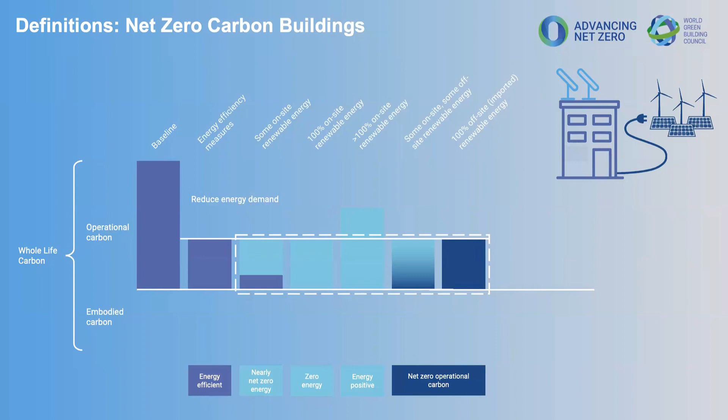And that's why we focus on the term carbon, net zero carbon, which means that you could supply some of your energy requirements from on-site renewable energy, but that the balance, or indeed maybe 100% of your energy, is met by off-site renewable energy generation from solar farms or wind farms, and that could be delivered through the grid, or it could be through power purchase agreements or renewable energy certificates. And so we call that net zero operational carbon, covering the emissions associated with the use of the building.

And then we have the need to reduce embodied carbon as well. So the embodied carbon comes from the materials and construction processes that go into creating the building in the first place. And again, the same principle applies: reduce embodied carbon to the minimum that's necessary in order to continue to build that building.

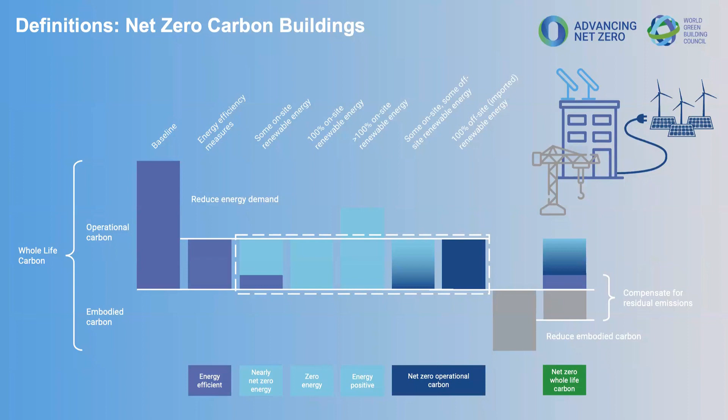If you're then able to compensate for any residual emissions that come from the operational carbon, maybe you're still connected to a fossil fuel grid, or maybe you have on-site diesel generators or gas boilers, even gas cookers, you can compensate for those residual emissions through high quality offset schemes. And that would mean that your building is net zero whole life carbon when you also include the embodied carbon within those calculations. So that's a very quick tour through the terms that we use, and hopefully that will help frame some of the things that I'm about to share with you.

So our Advancing Net Zero Whole Life Carbon mission and vision is based on a set of principles. Firstly, for operational carbon, reduce and optimize energy demand, then generate the balance of that energy demand from renewable energy, then compensate for any residual emissions, and then finally plan for deep decarbonization.

For embodied carbon, the same goes: prevent first, reduce your carbon first, and maybe that's through prioritizing renovating an existing building instead of building a new one, for example. You reduce and optimize your embodied carbon through your design choices, fossil fuel-free construction, or thinking about lean construction, and then the sorts of materials that go into the building.

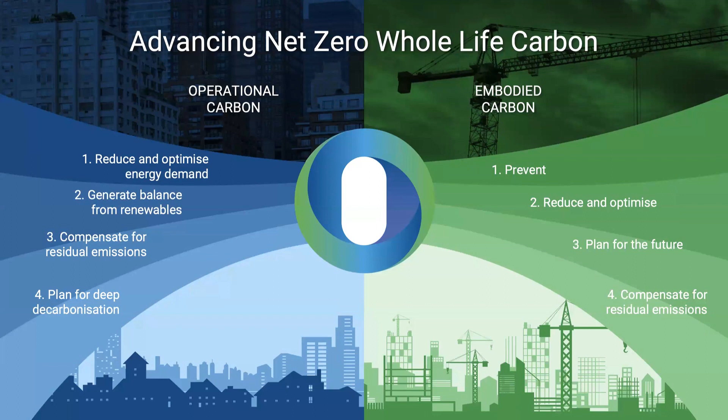Planning for the future, so thinking about how you can optimize a building to be renovated in the future, reconfigured internally so you don't have to move building, it's easier to use and extend the useful life. And how can you deconstruct that building so that you can use the materials all over again? And then finally, again, compensating for residual emissions.

I've mentioned our 2030 and 2050 dates already. We need to see all buildings as net zero, including existing buildings, by 2050. And that has a huge implication in the way that we design our buildings, the way we use them, the way we build them, and the supply chain as well. And we need to see for new buildings, where we have a greater opportunity to influence the way they're designed and built, that those are net zero from 2030. And that's just 7 to 8 very short years away. And in design terms of new buildings, that's just around the corner.

So we have introduced a leadership track that's called the Net Zero Carbon Buildings Commitment, and businesses and organizations commit through this commitment to achieving the 2050 dates by 2030. So that means that in their existing buildings, they're eliminating all their emissions and compensating with offsets, and that new developments are achieving maximum reductions in embodied carbon and also compensating residual emissions through those high quality offsets.

And that through their business activities, they are advocating for all buildings to be net zero whole life carbon by 2050. So for example, you're a design firm, the commitment covers the offices that you occupy, but then you're also presenting and using and channeling those concepts through the design work that you do as a firm. And that's really important because that's helping us understand what are the business models, the design approaches, the tools, the technologies, the materials, the innovation. What do we need in order to get from where we are now to that 2050 goal?

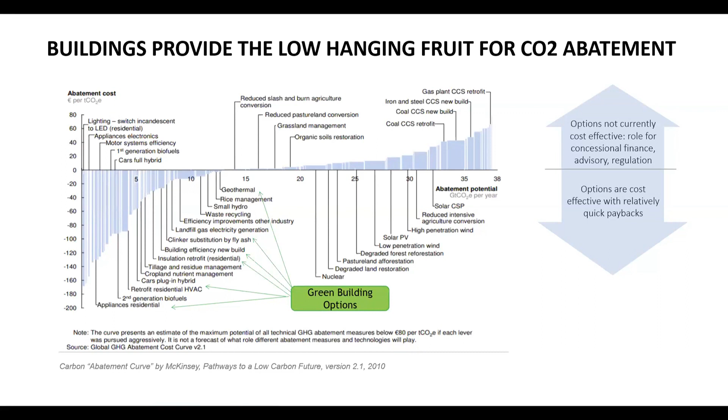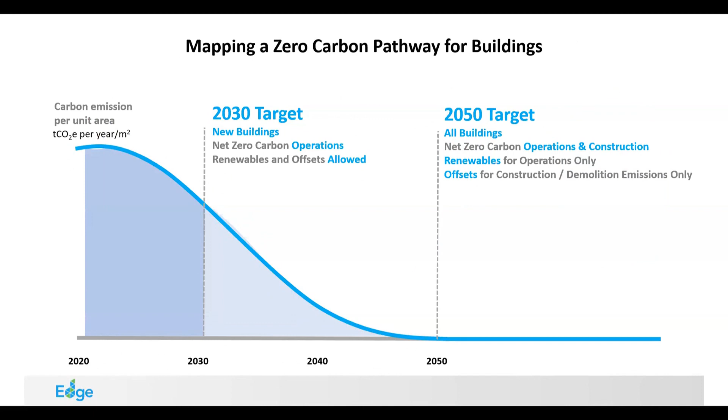Here you're able to see the path to net zero, which Ms. Burrows talked about in her presentation. The target, as she mentioned, was by 2030, all new buildings need to achieve zero carbon in operations. And by 2050, all buildings, both new and old, need to achieve zero carbon. Now, how are we going to do that? What we've seen is that between 2030 and 2050, we really need to set some targets for developers and for building owners on how they can decarbonize their portfolio.

For us, the first step should be to map the entire existing building portfolio within EDGE, and we will look at how that will be done. This will give the developer, the building owners, clear information on their current emissions, and then also the entire portfolio's carbon footprint. Then you are able to plan for the necessary retrofits that would be needed so that it can comply for the EDGE certification.

And then the second step would be to set clear certification targets. We think that building owners should be able to plan to bring their building portfolio to become compliant first. And then they also need to make sure that the new and existing buildings can comply with at least the basic certification system. So this would mean that each building should be saving at least 20% on energy, 20% on water, and 20% in embodied energy in materials. And this is for both new and existing buildings.

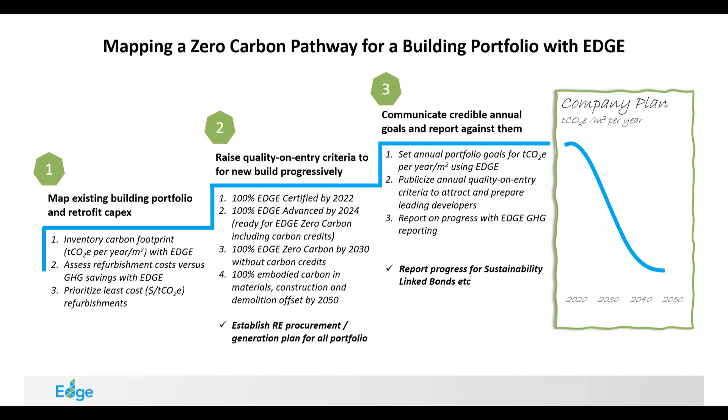Let's look at EDGE in general. So I did talk about the standards. EDGE basically includes a free software. It's a very rigorous but streamlined standard that looks at least 20% reduction in operational energy, operational water, and the embodied energy in materials. And it compares this to a local baseline. It also has a certification system which is administered through a very large network of green building certifiers in the world, but the quality control is done by the IFC.

Now, the interesting thing with the software is that it's able to get you to make decisions as quickly as possible. The interface is easy to be used even by a CFO who has no idea about buildings. He's able to figure out a rough financial cost and benefit of the certification in a few minutes. Secondly, architects can also work with the software even before they have a design to choose what set of green design options would be needed in their project. And this is very important because when green measures are incorporated very early in the project, you are able to reduce the extra cost of going green.

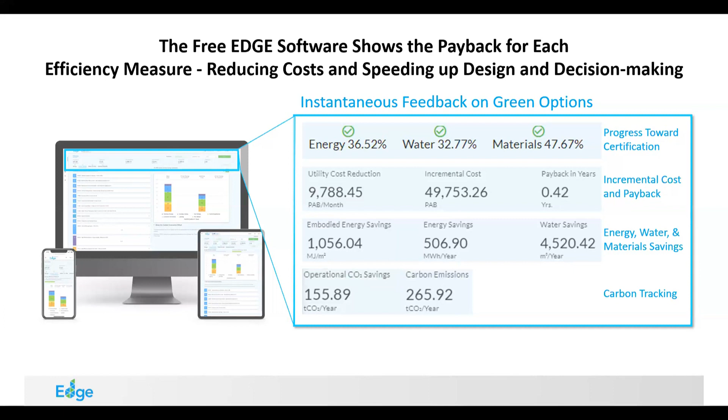Now, we've seen that EDGE has grown very quickly, mainly because it ticks the box for all the major green finance standards. So once it's utilized, you are able to access these financial requirements wherever they are available. Once the project is entered in the software, the designer can easily see what it takes to get EDGE certified. And you can either get EDGE certified, go EDGE Advanced, or the last bit being Zero Carbon.

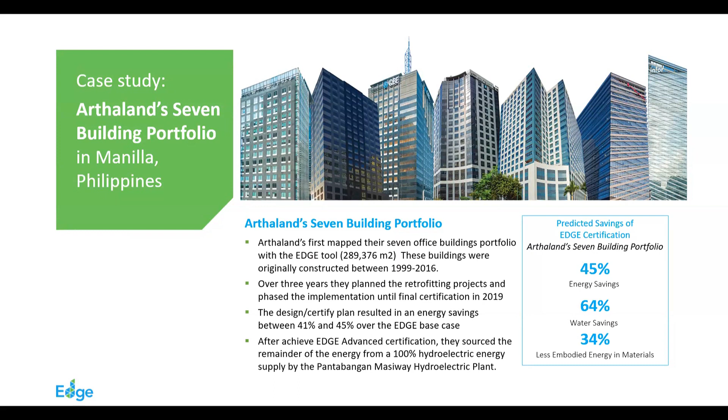Now, how do we really achieve the zero carbon certification? We see that it is possible with some very simple and sensible steps, and also by choosing your energy sources carefully. We have a client in the Philippines called Arthaland. They were able to certify their entire portfolio zero carbon by, first of all, reducing their energy consumption by 45%. And then they offset their energy with zero carbon hydroelectric power. But how does it really look within EDGE? This slide will help provide some more explanation.

There are a lot of options when you're looking at zero carbon certification using EDGE. The first and most important step would be to reduce your building's energy consumption by implementing passive measures. Examples of this could be having a reduced window to wall ratio, insulation of your external walls, insulation of your roof and floors, incorporating energy efficient lighting, and then, most importantly, making sure you have a correct orientation.

Now, these measures are not the most expensive ones. They are very, very cheap. And then also when it comes to implementation, it is very, very effective.

Secondly, you can also now look at the more active measures. For example, having efficient heating or cooling, putting in place lighting controls, putting in place efficient boilers, and more. This may be a bit more expensive, but they are also very effective at reducing energy usage.

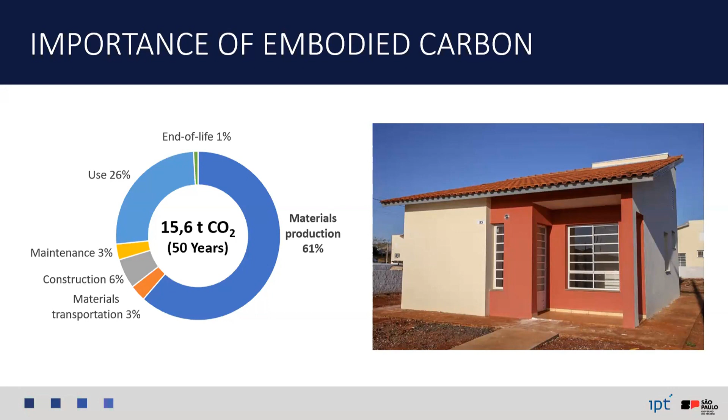Unlike European or North American buildings, we do not need to heat the buildings here in Brazil. And our electricity is predominantly from renewable sources. So if we are talking about decarbonizing the construction industry here, we have to look at the embodied carbon.

And why did we decide to develop our own database of construction products instead of working with foreign emission factors and going straight to the building level? Because it makes a huge difference between using primary data and secondary data from these foreign databases.

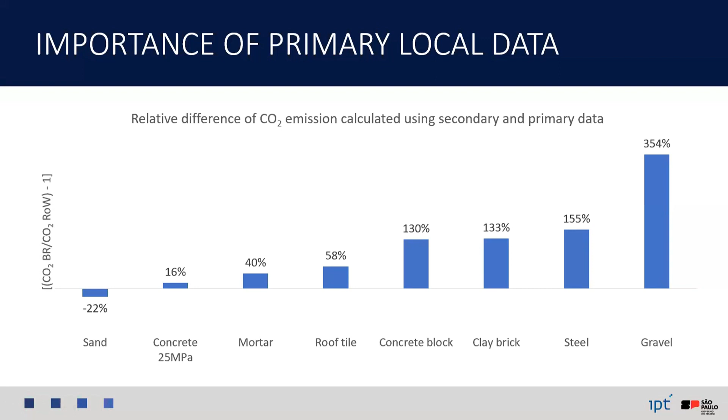And that's why we chose to develop our own local database. So our database is called SIDAC. It's the acronym in Portuguese for Information System for Environmental Performance in Construction. It's a web-based system for calculating and disclosing environmental performance indicators for construction products.

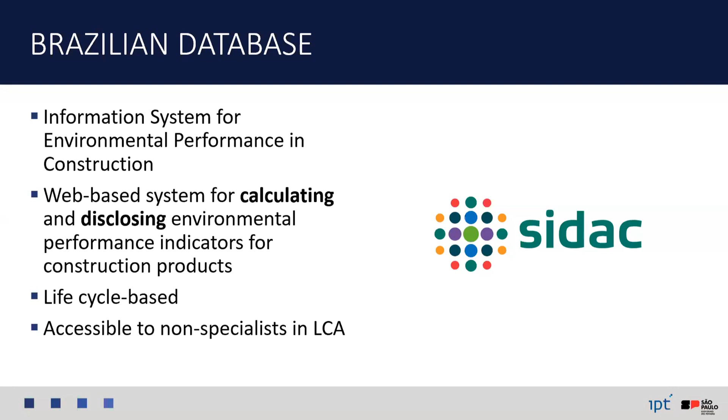It's based on the life cycle approach, but it's meant to be accessible to people who are not experts in LCA, which are most of our construction professionals. And if we consider the presentation that Victoria did about the urgency to reduce carbon emissions in the sector, we cannot wait until everybody becomes an LCA specialist. So that's why we made it user-friendly.

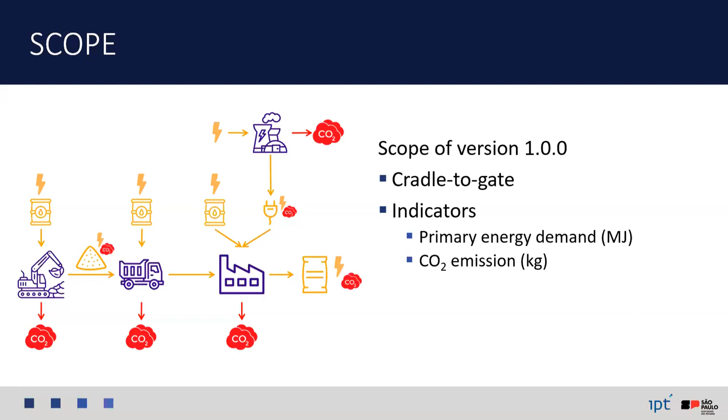The scope covered in this first version of the database is from the extraction of raw materials from nature to the factory gate, so it's cradle to gate. We covered 2 indicators for now, which is the primary energy demand and the CO2 emission, also known as embodied energy and embodied carbon of the materials. In the future, we can extend the scope to cover other indicators like water consumption or material footprint.

The system has several functionalities. To calculate these indicators, we need a database. So we have a database with some data for the main construction products and also basic inputs like electricity and fuels. Then we have a calculator to build the life cycle inventory and calculate these indicators from cradle to gate.

If the person wants to publish the data, there is a review workflow for a third-party independent verification of the numbers and the underlying information. Once it's published, there is a search interface that I will quickly show you. And the system can also issue automatic simplified EPDs in PDF files.

We also have some basic information like electricity supply from the national grid, fuels, transportation processes, waste disposal, and water supply. All these data are based on generic data from previous data collection initiatives and literature here in Brazil. But the system is now prepared to receive manufacturer-specific information, though it doesn't have any manufacturer-specific information yet.

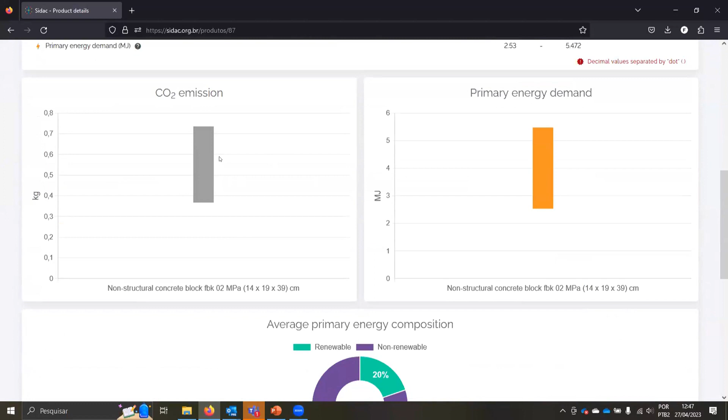We also have it in graphical representation, and you can see that we have a range here because it's generic data. So we account for the possible variation in terms of product composition, production processes, etc. And for the generic data, we also make available detailed information about the process and the life cycle inventory that generated that indicator.

Just to finish here, let me show you quickly how the calculator of the system works. You must be logged in, but it's also freely available, so even you, if you want, can test it. Let's create a very simple product here, let's say concrete. We have to create the process inventory with the inputs and outputs, like in an LCA.

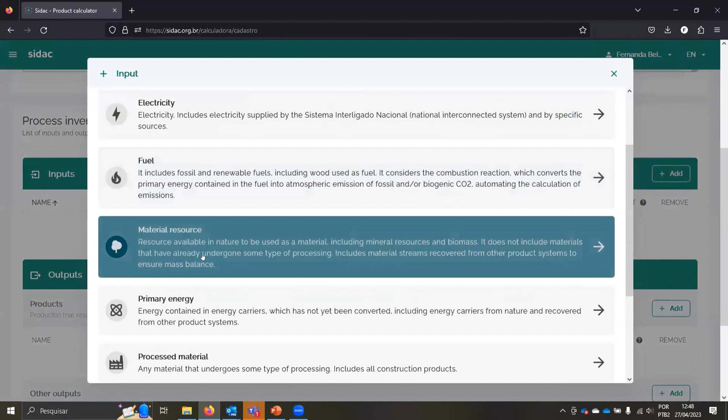So let's take here cement, this type of cement, sand, and stone, and let's also take some water. So we add everything we need to make this concrete, and also the product that we are producing, so it's concrete, and we are talking about 1 cubic meter. Then we put the quantities of each raw material, let's say it's like this. This quantity is per cubic meter of concrete.

We can also add the transportation to the ready-mix concrete plant, for instance. Let's say cement from 300 kilometers away. You can do this also for the other materials.

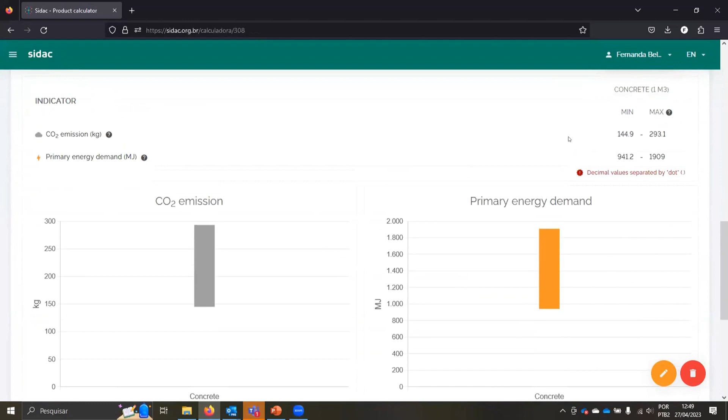Once you save it, the system automatically calculates the cradle-to-gate indicators, so they are shown here. For this type of concrete, this is the range of CO2 emission and the primary energy demand, and also the average energy composition between renewable and non-renewable sources. Now this product is saved here, and I can modify it if I want. And if I were a manufacturer, I could also forward it to the review, and it would be all done online. So back to my presentation.

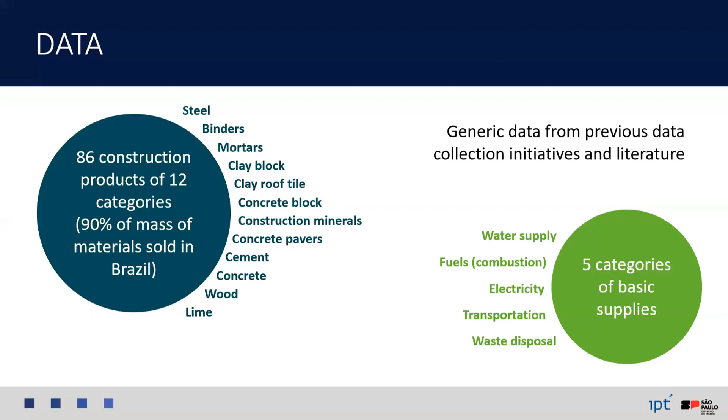It's important to mention that SIDAC was commissioned by the Brazilian Ministry of Mines and Energy, so it's a public system. It's coordinated by the Brazilian Council for Sustainable Construction, and it was developed by a consortium of Brazilian universities, research institutes, and a local software developer. We had the support of several committees: an executive committee to follow up the project, a scientific committee that reviewed our methodology, and an industry committee to ensure that the system would fit industry expectations. It was funded by the European Union and Germany within the International Climate Initiative.

So our next steps here in Brazil is to develop more the materials part, so increase the diversity of generic data in SIDAC, because we do not have all materials there, and also include manufacturer-specific data starting this year. And now that we have the data for the materials, we can evolve to the building level.

It's our intention to develop new tools for building assessment and even integrate with existing tools like Edge, for instance. I think it's possible. And we're also working with the federal government on public policy making to include the requirement of assessing the environmental indicators of products and buildings that are parts of publicly funded initiatives.

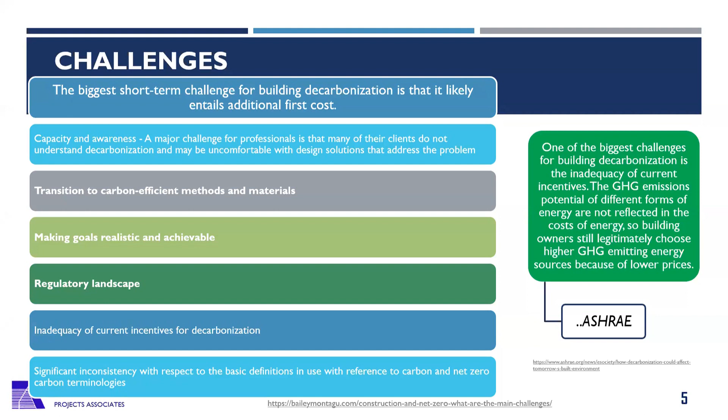And then, of course, going technical now, there are some inconsistencies with respect to the basic definitions being used in reference to carbon, net zero carbon terminologies, and so on and so forth. Some would say net zero is achieving this, another might say net zero is achieving that. So there are some small inconsistencies, but I think there's an organization in the UK, the Low Energy Transformation Initiative, that is trying to harmonize some of these definitions. They actually have a policy document to that effect, to harmonize these seeming differences in basic definitions.

So now that we've spoken about the challenges, what about the opportunities? It's not all negative. There are opportunities available for us as professionals. If a professional is needed at the very onset, that means there is an opportunity for a professional to get involved. But for you to be involved, it's not only about looking at buildings, like I mentioned; you must also perceive it as an ESG issue, a strategic opportunity to engage with other stakeholders. No one professional can embark on decarbonization alone. It requires a collective effort.

Everybody needs to be involved, because ultimately, what is going to make it attractive to a stakeholder is that you are reducing the cost of construction, or reducing the cost of maintenance, or improving the quality of life, or improving the environmental performance of your building, or enhancing the economic performance of your building, and of course, improving perceived social value. All these things are important. Those are the things that will help propel the opportunities that we have as professionals.

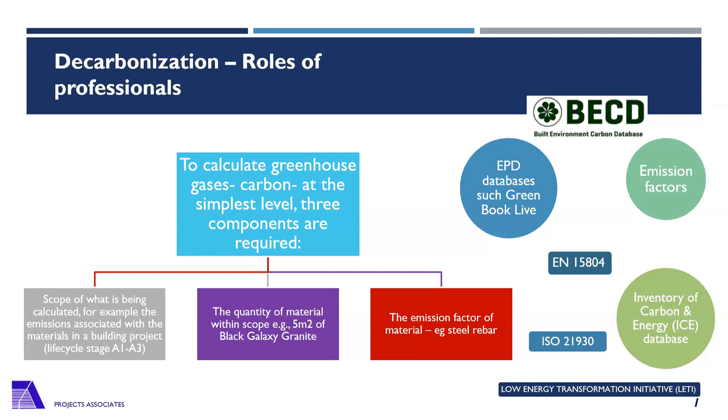You can have access to some of the data you will need in order to be able to do this. And of course, ultimately, we'll be talking about doing a life cycle assessment. Now, what are the career opportunities? According to the Canadian Institute of Energy Training, there are different opportunities that are available.

You can be a climate change or decarbonization manager. You can also be an ESG manager. You can also go to become even an energy engineer or specialist, or a sustainability manager. You can decide on any one of these. These are all roles that come into play when we're talking about decarbonization. And of course, at the bottom of it all is that you are able to carry out a life cycle assessment, because that is what will be able to bring out the whole life carbon footprint of your project.